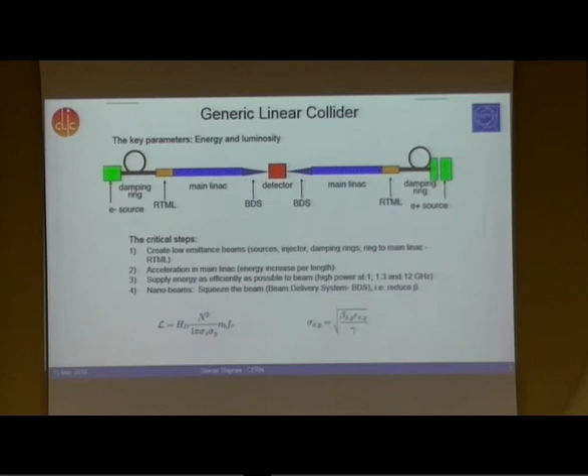For CLIC, we are using normal conducting X-band structures, so 12 gigahertz structures. For ILC, one is using superconducting RF structures. CLIC has set the goal to make this accelerator as compact as possible, and we are aiming now for a 380 GeV accelerator, which will be only 11 kilometers long. So it's a bit longer than the diameter of the LHC ring, but in fact it is quite compact. Then for any linear collider, one has to go through a beam delivery system, BDS, to try to reduce the beam size to the minimum, because what goes into the luminosity of the machine are the emittances and the beta functions of the beams, and then one has a detector. Next slide.

Here you see a map of a possible implementation of CLIC in 3 stages. So we are aiming for a first stage at 380 GeV, 11.4 kilometer. Then a second stage, which is still an open question because this depends on physics, around 1.5 TeV. And then we think the maximum we can go with this technology, given the geographical footprint in the area, is around 3 TeV, so 50 kilometer long machine.

But most of the work now is related to the 380 GeV machine, because we know already with the discovery of the Higgs and the known mass scales of all the standard model particles, that with the 380 GeV machine, we can do studies of the Higgs, we can do studies of the top quark, and all the other standard model particles in great detail.

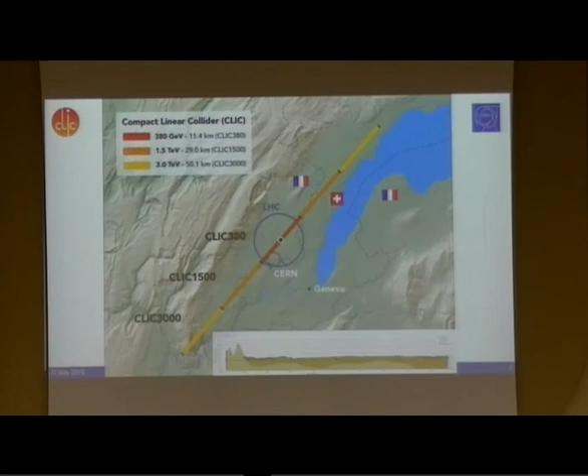Next slide. This is quite a complicated slide, and I don't think I would like to go in very much detail on that. First of all, up in the right corner, there is a little film you can play, but I will not try to play that online. I think that's too risky.

You can see the concept of the CLIC machine is, as I said, one has an injector. If you start in the yellow boxes close to the bottom, you have an injector for electrons and positrons, and then a pre-damping ring and a damping ring for positrons and a damping ring for electrons. One transports these beams out, and then you accelerate them in the main linac towards the collision point into a beam delivery system.

What is special for CLIC is that the most difficult thing, in addition to having the high gradient, is to supply the RF power to this machine. And if you try to do that, even with a 380 GeV machine with normal klystrons and modulators, you need 2,000 to 5,000, depending on the implementation of these modules. So this is possible, but when we go to 3 TeV, it becomes impossible. There are just too many of these klystrons needed, and the lifetimes and the reliability of them will not make it possible.

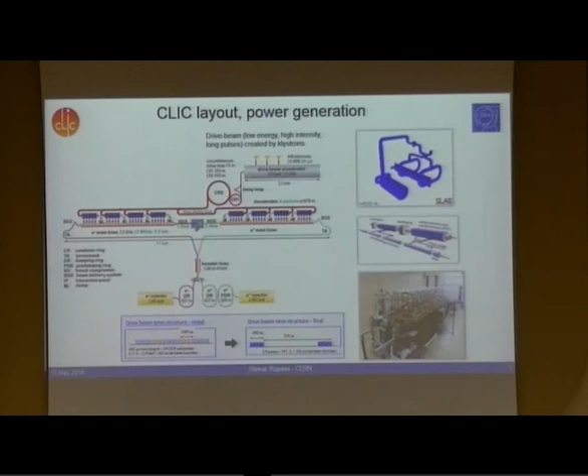And we have also, I will show that later, put such concept structures into a beam and proven that we indeed can extract the power and inject the power and get the acceleration we need. And as I said, if you run the film up in the right corner, you will see a demonstration of how this is happening. Next slide, please.

Okay, Maxime, now I move to the next topic. I will just show 3-4 slides about the main technical results we have. So if you go to the slide called two-beam acceleration now. Steinar, yes. I'm trying to follow your slides with a laser pointer.

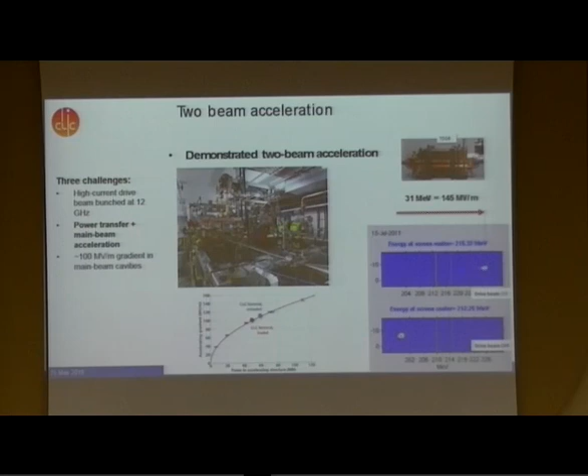Next slide. The next slide is really in Walter's domain, but this is really the core technology development of CLIC. These are X-band 12 gigahertz normal conducting copper structures, and in the middle you see a little disc, and we put 24 or 26 of these discs together, and we create the accelerator structure, which is shown in the middle. And then we pulse these structures with the systems shown below.

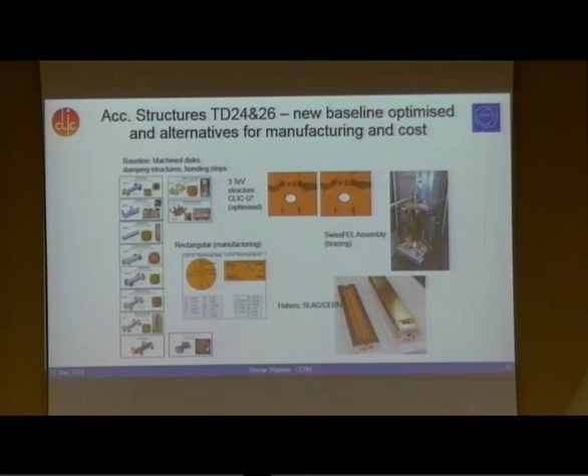And the next slide I can go through very quickly, but it's just to prove that there are industries who can do this. They can produce all the different parts of the machine, and of course that's important for the credibility of making it possible to build such a machine.

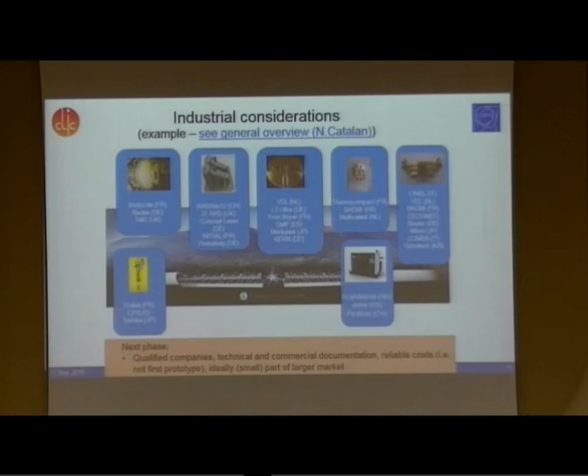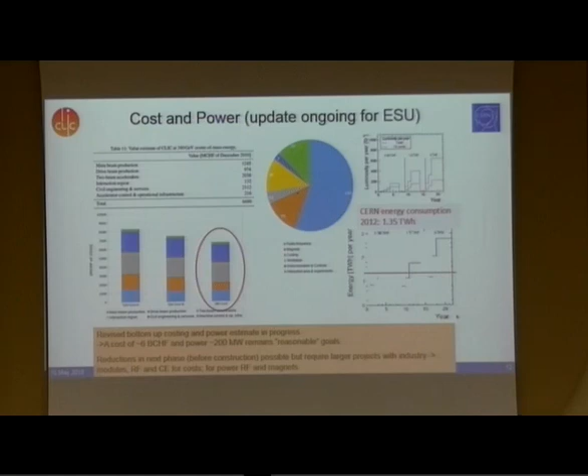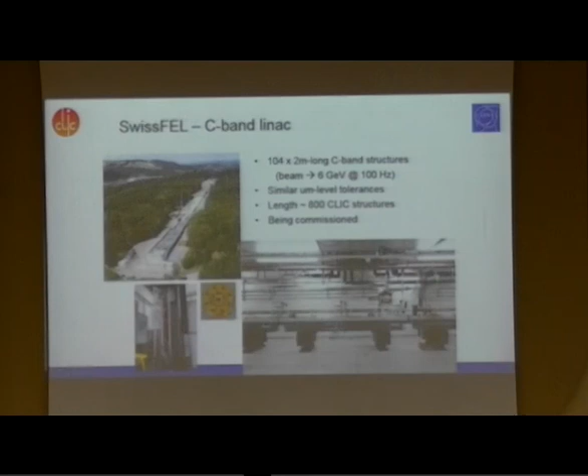Another key performance parameter, in addition to the energy, of course, and the gradient, is to make sure we have high luminosity. And this is quite complicated. We have to align the components of the machine over a significant distance. We have to control and damp vibrations from the ground to the accelerator. We have to measure the beams extremely well because that helps us to steer the beam and optimize positions of elements. We need sophisticated algorithms for measurements of beam and components and the feedback between all these.

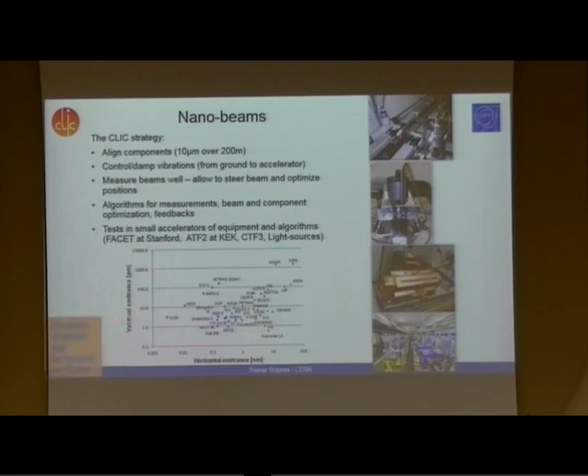And then we test all this in smaller accelerators. We test at FACET at Stanford that we can preserve emittance, ATF2 at KEK that we can produce the final focus parameters needed, CTF3, which is the machine I mentioned where we proved the two-beam scheme, and then light sources, which already produce emittances as we need for CLIC. So we try to put all this together to prove that we can reach the luminosity we advertise for the machine. Okay, go 2 slides forward. In fact, 3 slides forward, Maxime, to come to a very blue slide.

Yes, that one. So we are now thinking about what we need to do in the next phase of the project. And again, I will not go into detail, but you see the main parts of the project. We have to continue developing modules as needed for CLIC. And in fact, these modules are also very interesting for free electron lasers, where you can make very compact machines with this technology. We need to keep optimizing our structures. I mentioned producing them in halves.

We have to work on high efficiency klystron modulators, which provide the RF either to the drive beam or to the main beam if we want to do it directly. We are developing magnets. We need a lot of magnets, not very powerful bending magnets, but very sophisticated quadrupoles and focusing magnets of various types. And we try to work with permanent magnets to get the power down. And then there are all the practical and important issues related to civil engineering and infrastructure. So these are some of the key activities in the next phase of the project.

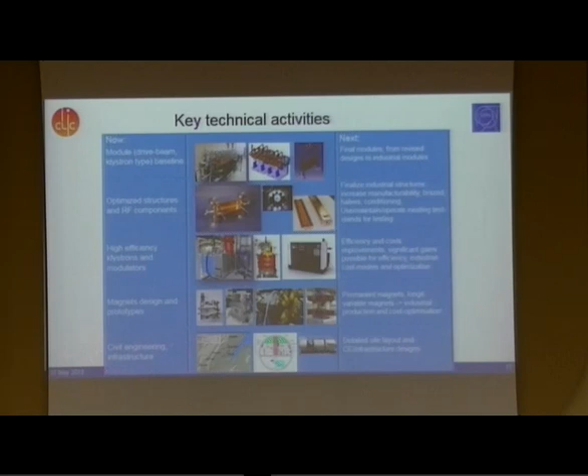Next slide. This is done as a collaboration, and the collaboration is a bit interesting. It's focused around CLIC, preparing the CLIC machine, but many of the collaborators now are using or planning to use the same technology for free electron lasers, varying from the large scale, so a 6 GeV machine, down to the very small compact machine you see at the bottom, where you have a 50 to 100 MeV electron beam colliding with a laser, and with Compton backscattering, becoming a mini light source, which you can use in-house.

So this is a 5 to 10 meter machine, which one could imagine putting in universities and in industries such that they can use it for investigations of material or biological samples or art or whatever they want to do with these types of machines.

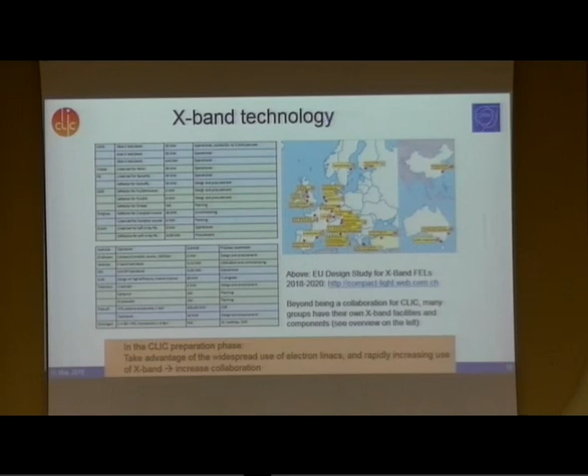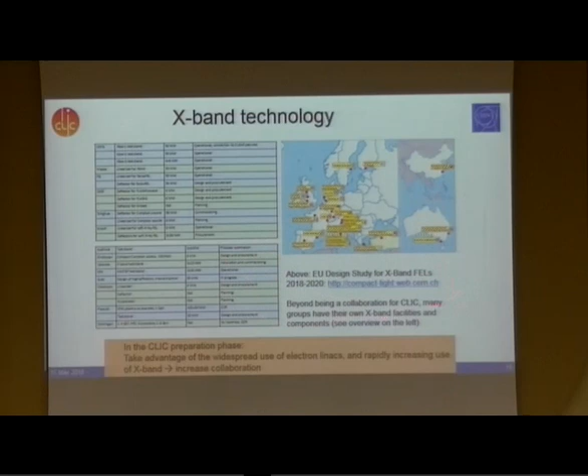Next one, you see here a list of the institutes around the world which have this type of technology, and this is increasing all the time. Walter, who is listening, keeps a close eye on the development in all the different institutes around the world. And we also have a design study supported by the EU for using this X-band technology for free electron lasers. And of course, next slide again.

Let's see. We are also thinking, could we use this type of technology for a smaller machine at CERN, for a specific type of physics, before we could implement a full CLIC? And we have a series of studies now which is called Physics Beyond Colliders at CERN. And one idea is to produce a 3.5 GeV electron beam, which is a 70-meter long machine, so it's quite modest, and inject electrons into the SPS and extract them for searching for light dark matter.

So this is in the case that dark matter is not the familiar things we've been looking for at LHC and LEP and Tevatron. It's not in the TeV, 100 to 200 GeV or higher range, but it's more in the GeV range. This is a very interesting idea which many people are pursuing, and we have found that if we could get electrons into the SPS and extract them in a correct way, we can do this probably better than anywhere else in the world.

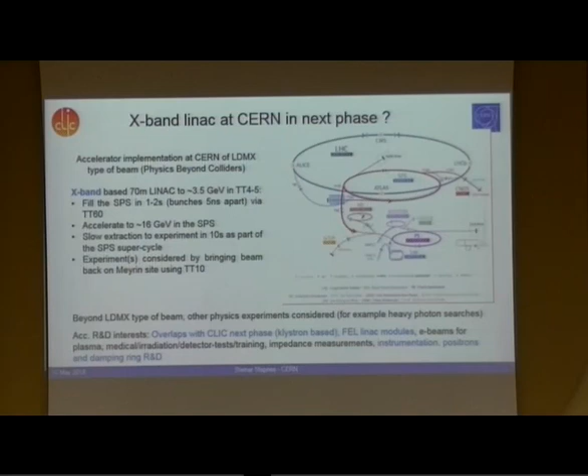So we are proposing this as a potential intermediate timescale machine at CERN using the X-band technology to make it cheap and compact. So this is another input to this European strategy. So this was a quick rush through the CLIC project. Then I will talk a little bit about what we have been doing with the Ukraine group so far. And these slides are in fact produced by Walter.

First of all, we have had a long-standing collaboration with Sumy, IAP Sumy, and this is related to X-band fundamentals, in the sense of what happens on the surface of copper structures and how we can optimize these copper structures. And this is experimental and simulation, and there's also exchange of scientific personnel related to this.

Next slide. So the issue there is that to test copper structures, I mentioned these Xbox systems, which pulse them at 50 hertz or 100 hertz and so on. But one could also imagine pulsing much, much faster, smaller samples, and then learn from that how to optimize the materials, both what type of materials, but also how to prepare the copper for use in an accelerator structure. So there is a setup like that at CERN where we've had key collaboration help from Sumy to characterize that.

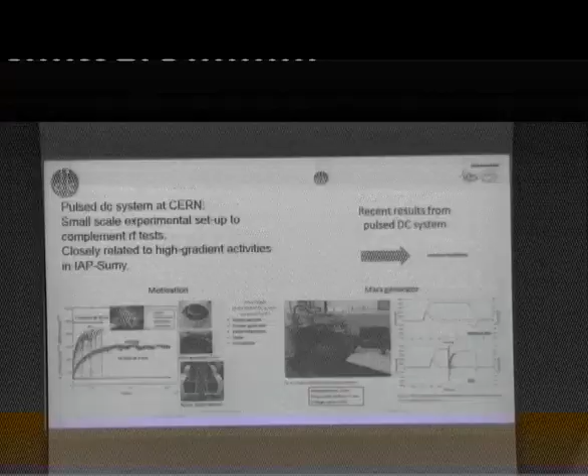And that's shown on the next slide. I think you need to. Is this the one called comparison of heat treated? Yes, it's comparison of heat treated.

Yeah, so this shows the different types of soft copper and hard copper, and how by pulsing with this DC system very, very quickly we can look at how the gradient develops, and you can see the difference in the two sets of curves. And we can also see that, for example, using hard copper, which is more tricky in a way when you put together the structures, we much quicker get to the gradients we are interested in.

So these are very, very interesting results, and it's very fundamental for us to understand as well, because it feeds directly back into how we produce the structures and how we specify these structures with industry. So it's an example of fairly fundamental research on material science applied in particle physics.

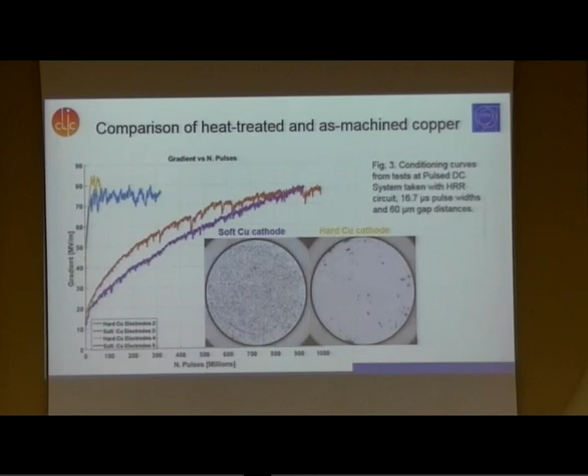Then I have a completely different one. And there, I think something has disappeared on the slide. This is an example, in fact, of, oh, sorry, I'm mixing this up. Yeah, so this is another example of collaboration. But let's go to the next slide there, Maxime. So the one after that.

So another area where we've had discussions for quite a long time. It goes back to 2013, 2014. We had a discussion with the groups in Krakow related to an EU application to support studies related to dielectric structures. This is now restarted in the sense that we have a working group inside CLIC to look at whether the CLIC machine could at some point be upgraded or changed using plasma technology or new technology for acceleration.

So this is a long-term development, which I will not discuss in any detail. And there are various ways of doing that. But one interesting way is to use dielectric structures. And in fact, we will have a presentation from the Krakow group on the 27th of June in our working group on compatibility between the CLIC machine and future technologies. And we also worked with Argonne in the US on this topic.

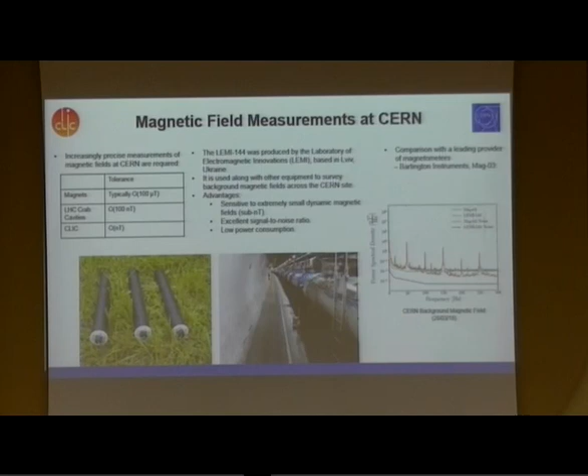And finally, one other area where I remember we discussed this in 2013 and 14, but we never followed it up. This is the idea of using an electron linac for neutron production, in fact, and I believe that has some interest in Ukraine, and we have other collaborators or other contacts there. We have in particular worked with a group in Tokyo, and I gave you a link to a talk at what is called a high gradient workshop in 2015, where they look at this, and the idea is that, of course, if you can make this electron linac very compact, this could have eased the implementation of such an electron linac.

And in fact, they're interested at the University of Tokyo because they even want to make this a transportable system, because they wanted to look at what happens in the Fukushima accident, and they wanted to move the electron linac up to look at the situation at the site after the accident. But they also have a facility at the University of Tokyo. And I remember we discussed this also with Jakov, if this would have an interest for future collaboration, but we never pursued it, and to my knowledge, we have not continued working on that. But maybe this is an area where we could consider future collaboration.

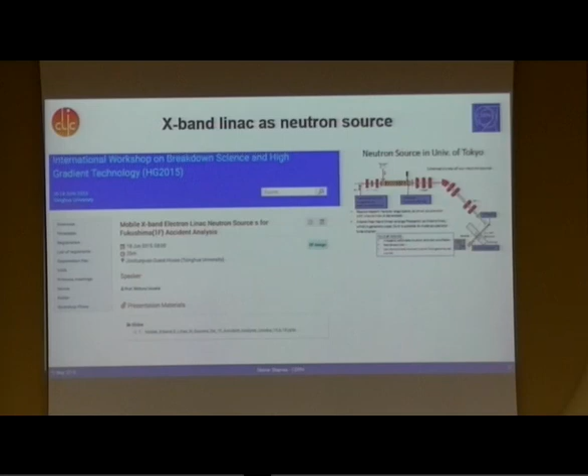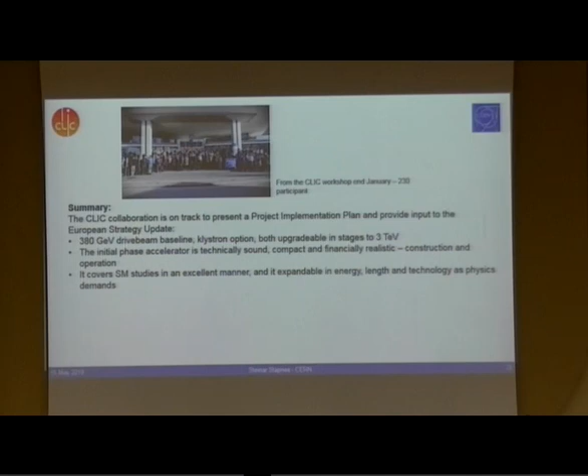Okay, so that brings me to the last slide. I go back to the CLIC collaboration. So we are preparing a project implementation plan for the European strategy. We focus on a 380 GeV CLIC implementation with drive beam as a baseline, but also looking at klystrons to drive the beam. Both are upgradable. So we think this is a healthy project in the sense that we think it's technically sound, it's compact, it's financially realistic, and so on. And it covers the standard model physics very well.

In the collaboration, and this is also an opportunity, I think, for groups in Ukraine, the technology is also a technology collaboration. So the technology has a spin-off to smaller systems, free electron lasers and other types of medical machines and so on, which I haven't talked about, but there it can have an impact to be able to go more compact, so this is interesting for many of our collaborators, and in fact we get a lot of feedback from smaller projects among our collaborating groups. We now are planning for the next phase, and of course we'd be more than happy to include interest from Ukraine in our plans for the next phase. That's it. Thank you.

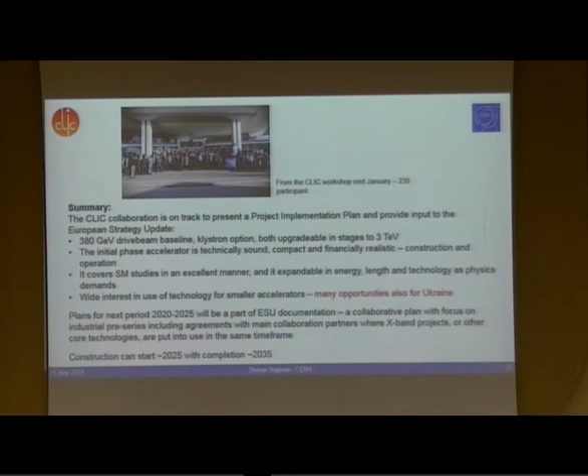More questions? No? Okay, so let's thank Steinar and Walter again for joining us. Thank you very much, we value your time very much, and we keep you for the next two talks, which will be related to CLIC structures. So we will keep the microphone on so that at the end of the talks you can ask questions if you would like, okay? Okay, thank you. Thanks. So we are in a hurry because we risk missing the conference dinner.

So I ask the next speaker to be shorter, also because Dr. Steinar already explained the main things connected with the ambitious CLIC project. So the next speaker, Dr. Vladimir Baturin, will explain experimental results obtained jointly with CERN.

Development of methods for increasing the stability of the material of accelerator structures to high vacuum electrical discharges in the CLIC structures, and experimental studies of the influence of an external magnetic field on the probability of a high vacuum breakdown.

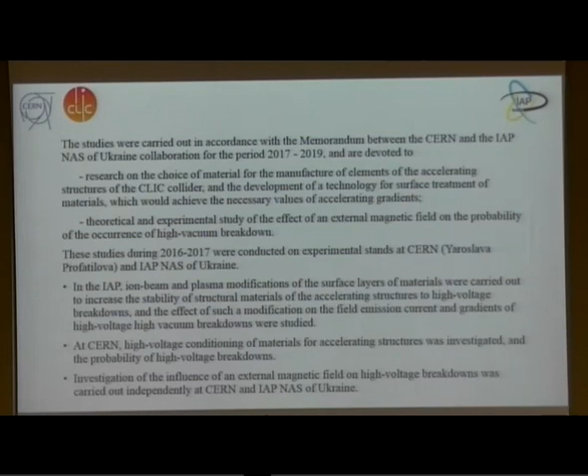At CERN, high voltage conditioning of materials for accelerating structures was investigated, and the probability of high voltage breakdown. Investigation of the influence of an external magnetic field on high voltage breakdown was carried out independently at CERN and the Institute of Applied Physics.

The CERN DC Spark system: the first installation contained a plain cathode and tip anode, and the next installation has large area electrodes installed. Experiments on the conditioning for different materials at CERN. Experiments were carried out on the large electrodes installation.

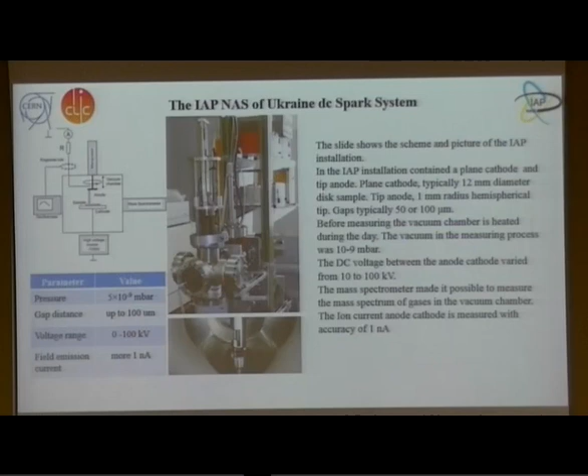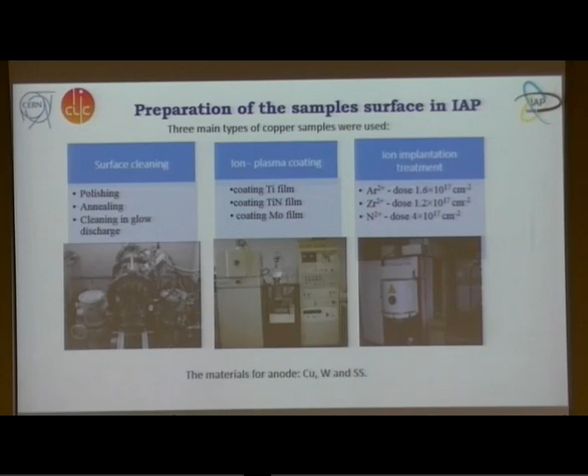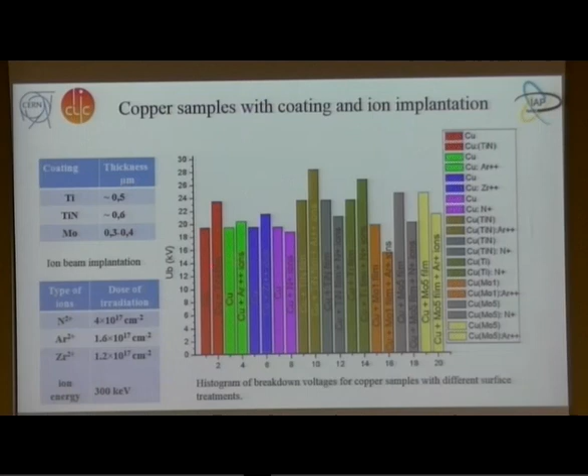This slide shows the total histogram of breakdown voltage for copper samples with different surface treatment: copper plus titanium film, copper plus argon 2+ irradiation, and others.

It can be different inclusions on the surface of the electrodes, grain boundaries, surface defects obtained during manufacture. In this case, the titanium nitride film smooths and fills surface defects. Thin titanium nitride films on the copper surface can behave as a barrier to the diffusion of gas from the cathode volume. In the study, the anode was made of tungsten.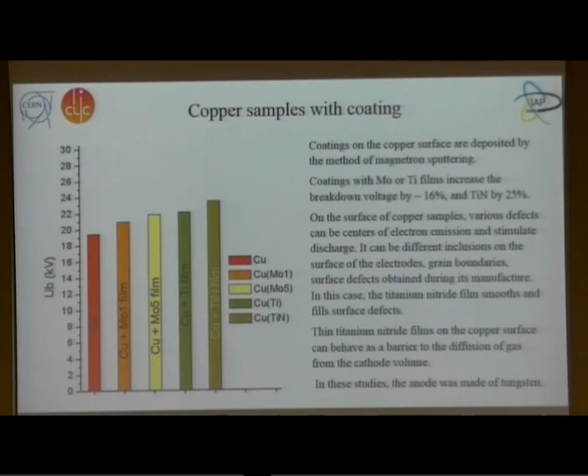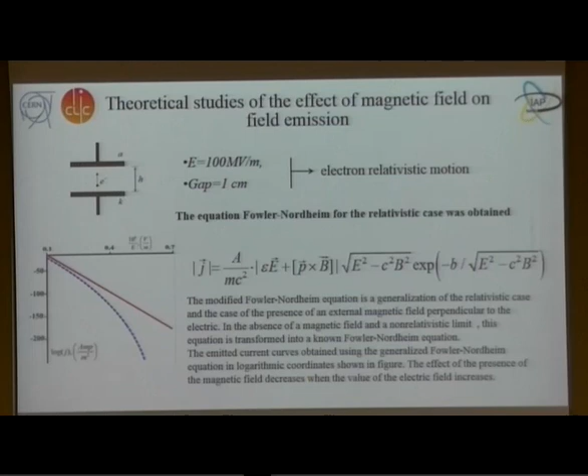A theoretical study of the effect of magnetic field on field emission. The Fowler-Nordheim equation for the relativistic case was obtained. Next, experimental studies of the effect of magnetic field on high voltage breakdown, where the magnetic field is perpendicular to the electric field. The experiments at CERN were carried out on the large electrodes facility. The magnetic field perpendicular to the electric field does not affect the probability of breakdown.

An experiment performed at the Institute of Applied Physics has shown that the magnetic field leads to an increase of the dark current between anode and cathode, and a decrease of the breakdown voltage by 10-20% for all copper samples, regardless of the surface modification.

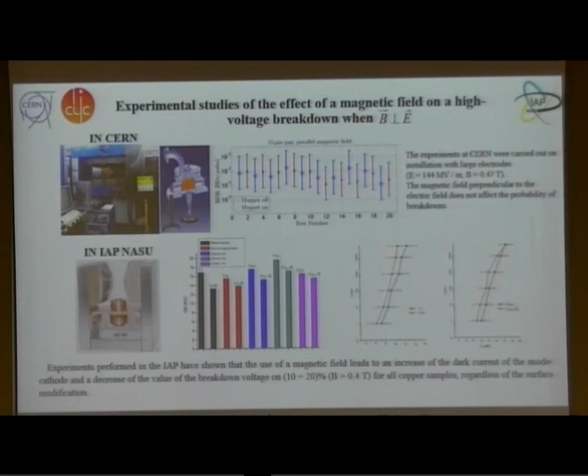Conclusion and future plans. The next project is planned to continue these studies, in particular to determine in more detail the optimal value of the thickness of the coating and the dose of the irradiation. It is also important to focus on the measurement of dark current and its dependence on the type of coating and the dose

on ion irradiation. It is also important to investigate the dependence of the breakdown voltage and the dark current on the distance between the electrodes. And ion plasma modification of large copper samples will be carried out for joint research at the CERN facility.

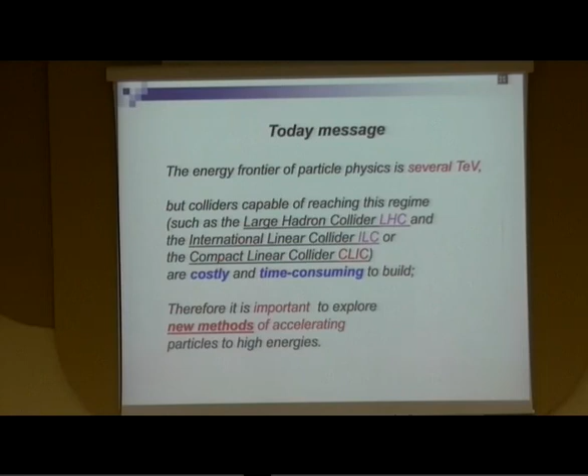Motivation of this study is that the energy frontier of particle physics requires energies of order TeV energy range. But colliders capable of reaching this regime, such as the Large Hadron Collider or International Linear Collider, or CLIC, about this scheme was reported in the first presentation of our session. These devices are very costly and time-consuming to build. You can see that the compact linear collider is planned to finish in 2035, after 20 years. Therefore, it is important to explore new methods of accelerating particles to reach high energies.

Future colliders, I am sure, will be based on an advanced method of acceleration. Among them, laser plasma wake field acceleration, beam plasma wake field acceleration, beam dielectric wake field acceleration. The best results now are experimentally obtained for laser wake field acceleration, where an accelerating gradient of about 100 GeV per meter is obtained in Berkeley National Laboratory and Texas University. And a scheme of plasma wake field acceleration obtained an accelerating gradient of about 50 GeV per meter at SLAC.

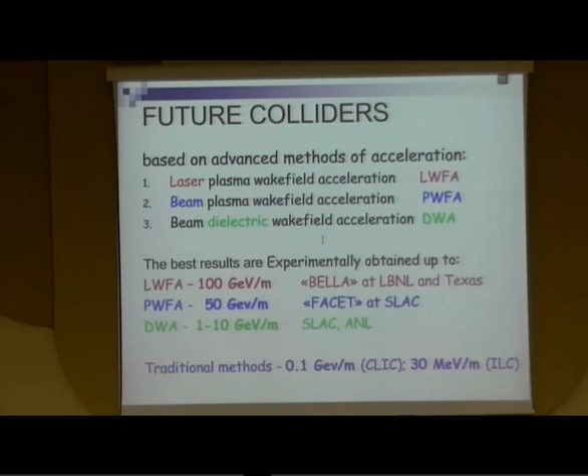And dielectric wake field acceleration now has obtained an accelerating gradient experimentally up to 3 GeV per meter at SLAC. For comparison, you remember that CLIC will provide 100 MeV per meter, and International Linear Collider will provide 30 MeV per meter.

Dielectric wake field acceleration is based on Cherenkov radiation of a bunch in a dielectric slowdown structure, and the accelerating gradient is proportional to bunch charge and inversely proportional to the square of the vacuum channel. And wavelength is proportional to 4 thicknesses of the dielectric layer.

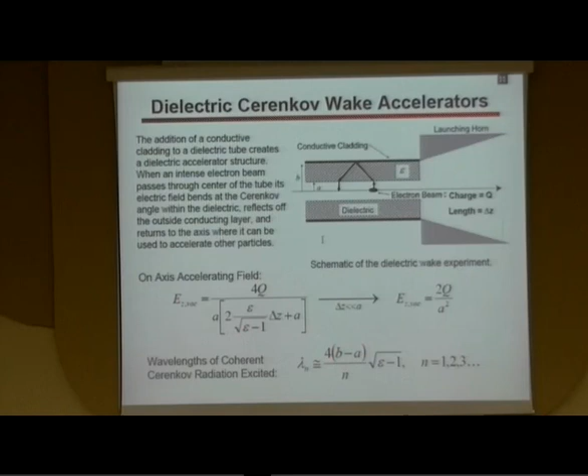The studies I will talk about are carried out in the framework of the execution of STCU project P5222 in collaboration with Argonne National Laboratory. The experimental installation on which we carried out our experimental investigation is shown here.

It provides the following parameters: beam energy of electrons from 2 to 4.5 MeV, pulse current up to 1 ampere, duration of the pulse 2 microseconds, bunch repetition rate about 2.8 gigahertz. The number of bunches we can change from 300 to 6,000. Each bunch charge is about 0.32 nanocoulombs. Bunch length 1.7 centimeters, and bunch diameter 1 centimeter.

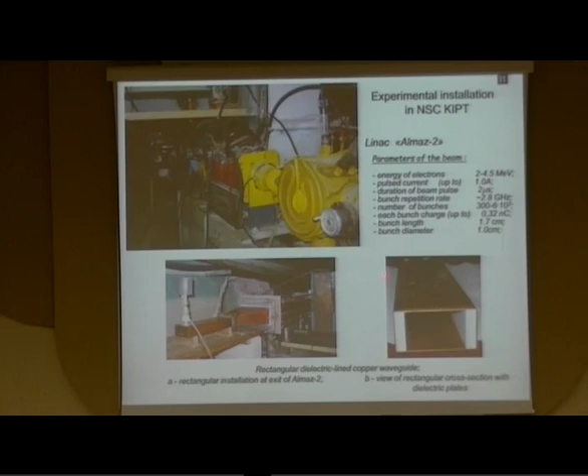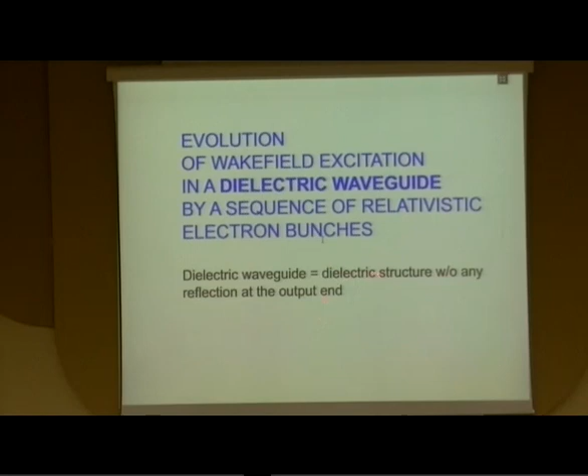Below you can see an example of the slowdown structures used to accelerate, and a rectangular example of our dielectric unit. At first, I will talk about wake field excitation in a dielectric waveguide by a sequence of relativistic electron bunches. By dielectric waveguide, I mean a dielectric structure without any reflection at the output end. What is the problem of this statement?

We have shown before that the Cherenkov radiation train behind the bunch at the waveguide exit is limited to some length. The Cherenkov train is proportional to the length of the dielectric structure and the difference between group velocity and phase velocity, or velocity of the beam. Therefore, due to removal of the wake field from the waveguide exit with group velocity, the maximal number of wake fields whose summation leads to total wake field increase is restricted to this number.

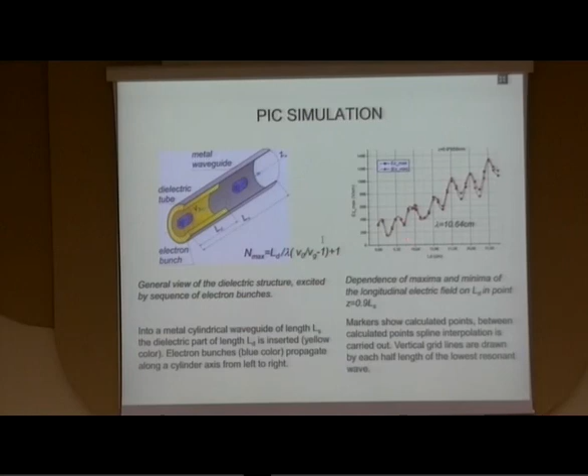Vertical grid lines are drawn for each half length of the lowest resonant wave. Maxima are located when the length of the dielectric structure is a multiple of half the wavelength of the principal mode. Experimental study results are shown in this slide. These measurements were made for a non-matched device and a matched device.

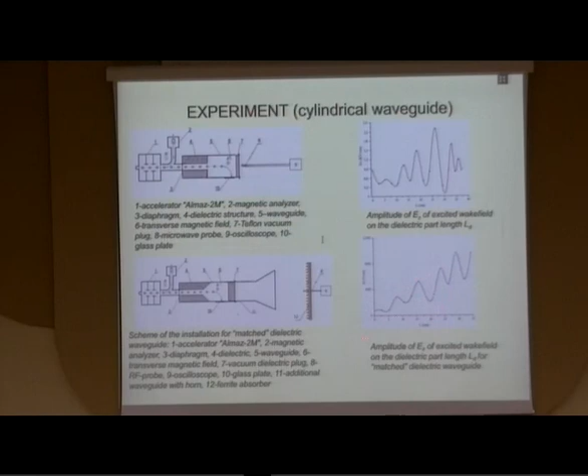This installation consists of the accelerator, magnetic analyzer, dielectric tube, dielectric plug, and measurement devices. In comparison with the non-matched case, there is a dielectric cone, horn, and ferrite absorber. The best result we obtained was for the matched case, and these results are in good agreement with theoretical prediction.

The second studies were made for a dielectric resonator, and by dielectric resonator I mean a dielectric structure with short-circuited input and output ends. The resonator eliminates the effect of removal of wake field from the structure, and the optimal condition of excitation of the dielectric resonator by a sequence of bunches is similar to excitation of an optical resonator by a mode-locked laser equipped with an optical switch. At the moment when a short pulse of radiation reflected from the output end of the resonator appears at the input, the optical switch injects the next pulse into the resonator.

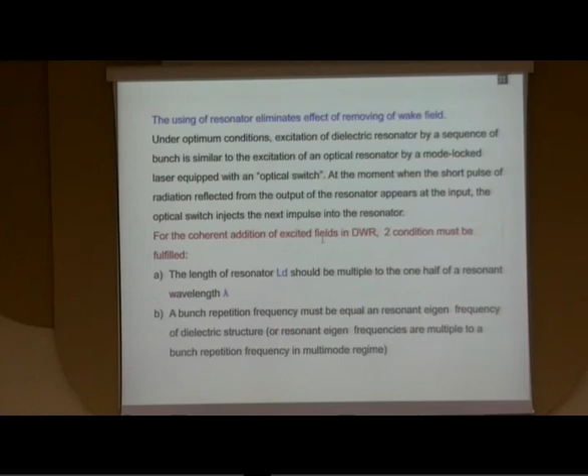For the coherent addition of excited fields in the dielectric wake field resonator, 2 conditions must be fulfilled. The length of the resonator should be a multiple of 1/2 of a resonant wavelength. And the second condition, the bunch repetition frequency must be equal to the resonant eigenfrequency of the dielectric structure, or resonant eigenfrequencies are multiples of the bunch repetition frequency in the multimode regime.

A planar example of increasing excited wake field in the resonator is shown in this structure. Parameters for the computation were chosen the same as the experimental installation. On the left, you can see the excited wake field after injection of 5 bunches. The excited gradient is 3 kV per centimeter, and after injection of 100 bunches, the excited wake field is equal to 60 kV per centimeter. Thus, you can see accumulation of the excited wake field in the resonator.

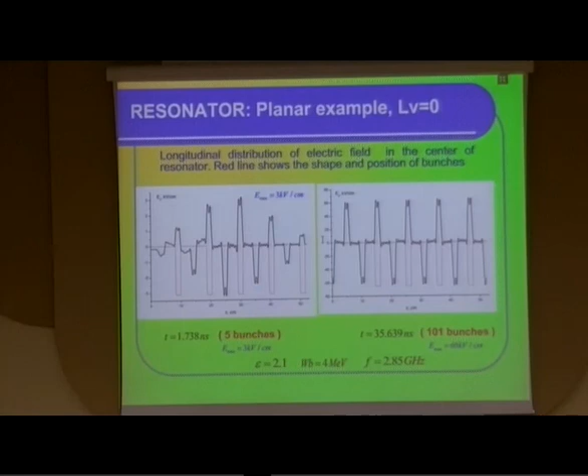For testing this prediction, we have made experimental measurements of the excited wake field in the resonator statement. In comparison with the previous installation, we have a dielectric plug to support vacuum in the dielectric unit, and a short circuit plunger in order to change the vacuum part of the resonator. In the right figure, you can see the dependence of the longitudinal electric field on the length of the vacuum part of the resonator. You can see very peaked maxima at the length of the resonator multiple to 1/2 wavelength of the vacuum part.

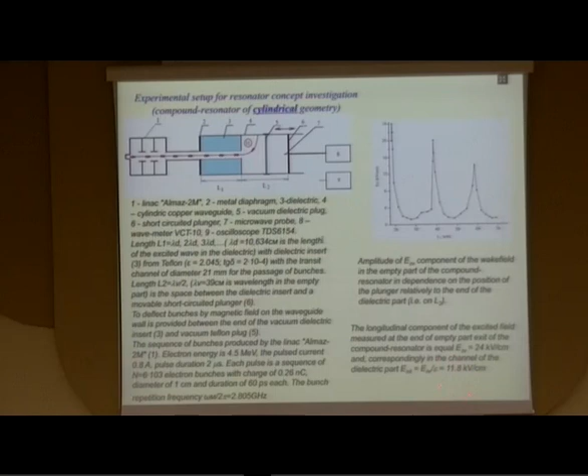In this case, we obtain an accelerating wake field of 24 kV per centimeter. That allows us to obtain an accelerating field inside the dielectric part that is equal to about 12 kV per centimeter.

The measured dependence of wake field amplitude on the number of bunches injected into the resonator is shown here. This oscillogram shows the beam current, red line, and microwave signal for three cases with different numbers of injected bunches. The first 300 bunches, 900 bunches, and about 4,000 bunches. You can see that with injecting additional bunches, the excited wake field increases.

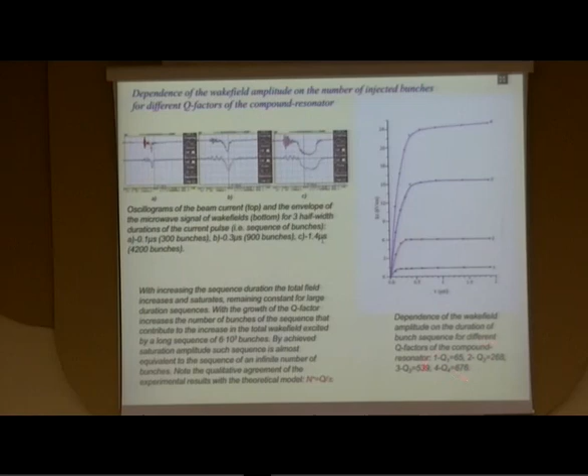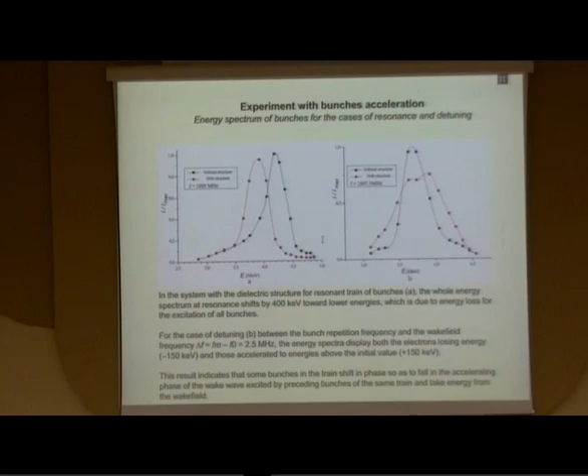We also studied the dependence of the excited wake field on the Q factor of the resonator. This is shown in this slide for different Q. Very low, a very bad resonator with Q of 65, and the last example, a relatively good resonator with Q of 678. We also studied acceleration in this structure. An example of acceleration is shown in the right slide. In these studies, we have obtained acceleration of bunches of about 150 kV.

The last studies of the plasma dielectric wake field accelerator focus on drive and accelerated bunches. Although the dielectric wake field accelerator has a lower accelerating field in comparison with other advanced schemes, PWFA or LWFA, it can be considered a promising candidate for future electron-positron TeV colliders. But there is one shortcoming. It suffers from beam breakup instability. Also, it is a common shortcoming for all linear accelerators.

In comparison with the traditional scheme of suppressing BBU instability, we proposed, for focusing of the drive and witness bunch, to fill the drift channel with a plasma of certain density. Also, plasma filling can increase the accelerating gradient.

Our idea is demonstrated in this slide, where the axial electric field, the accelerating gradient, and the focusing electric field are shown. You can see that the drive bunch, the yellow rectangle, and the accelerated bunch are in the focusing phase of the total wake field.

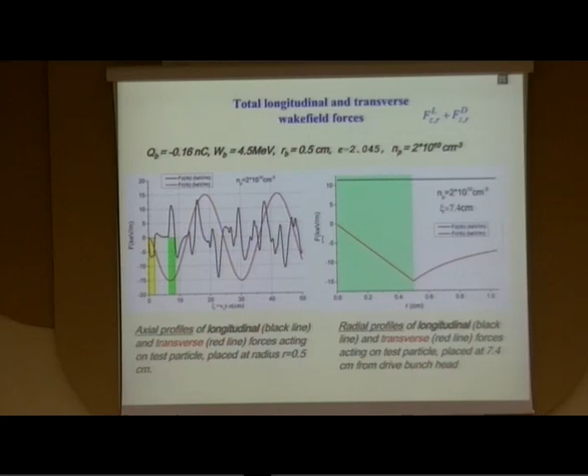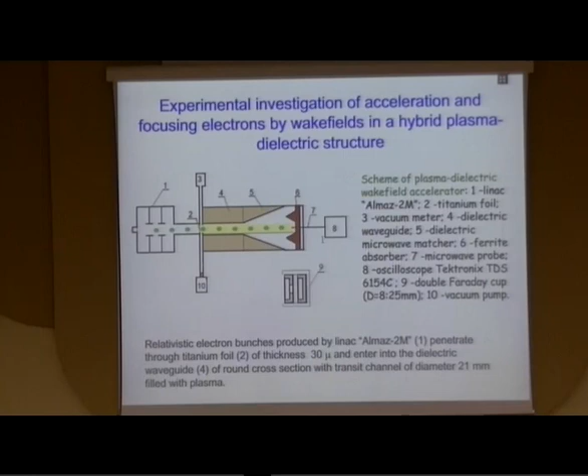For the experimental investigation of acceleration and focusing of electrons by wake fields in the plasma dielectric structure, we used this installation. In comparison with the previous scheme, we have a vacuum pump for pumping neutral gas in the unit, and for diagnostics of focusing, we have a double Faraday cup with different diameters, with different holes, and that allows us to measure the passing current.

I cannot do a conclusion. I'll say about further studies of our dielectric wake field acceleration. It is the arisen problems of wake field acceleration, wakes in long tubes, direct measurement of accelerating fields, measurement of the transformer ratio that plays a great role in acceleration. It is very important for multi-zone two-channel drive and witness channel dielectric accelerators.

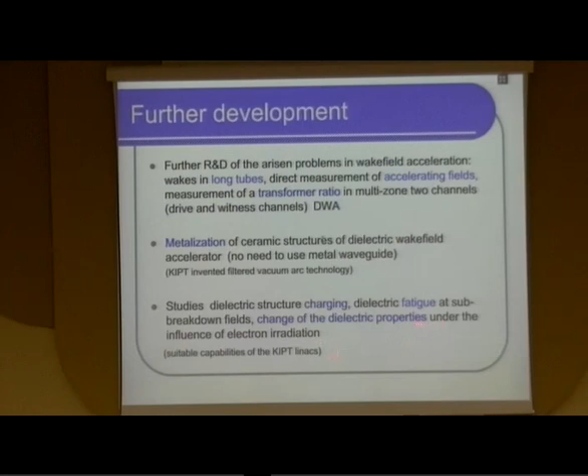Metallization of ceramic structures of the dielectric wake field accelerator, so there is no need to use a metal waveguide. And studies of dielectric structure charging, dielectric fatigue, sub-breakdown fields, change of dielectric properties under the influence of electron irradiation. That's all. Thank you. Thank you very much.

Does somebody have a question? Steiner, Walter, do you have some questions? Very, very interesting. It will be interesting also to see the slides. It was a bit difficult with the video connection. We definitely are very interested in this kind of work. Just a comment, of course, when comparing gradients, these pulses tend to be rather short compared to the relatively longer normal conducting and superconducting pulses. But I think we will look forward to discussing these subjects in the coming weeks.

Yes. I want to say that the scheme I spoke about belongs to the two-beam accelerator scheme. More advanced, but it is a two-beam acceleration scheme. I am very old, and I remember that 50 years ago, Professor Sarantsev in Dubna promised to build this accelerator. Yes, but you see, the situation is very complicated. So, supporting this very exciting idea, don't close the alternative, very mature and very recognized technology. It's just advice. Thank you for your comment.

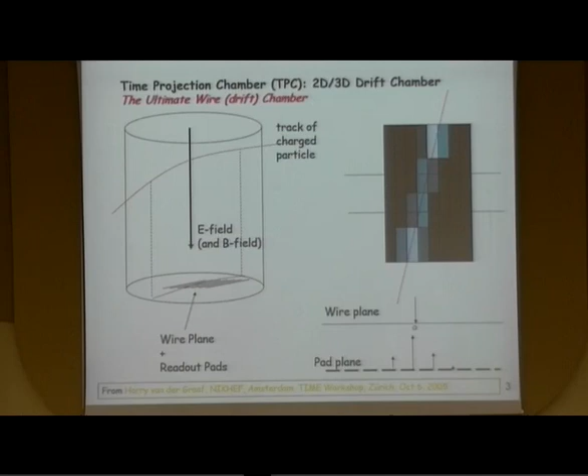Very simple, for the time projection chamber, time is short. The main readout used in old such systems on the 2D plane was wire drift chambers. In recent years, these wire drift chambers were changed by more perfect systems on the base of GEM or Micromegas or InGrid micro-pattern gaseous detectors. Some examples of these systems you can see here.

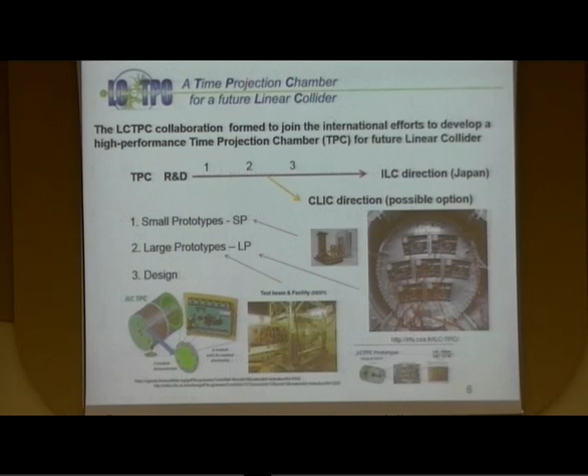LCTPC works in this direction: small prototypes, large prototypes, and design. Now, the large prototype is the stage of this collaboration. We also work in our directions in the scientific work in this frame: development of the test tool LITEH on the base of the electron linear accelerator at LAL.

Study of MPGD panels as part of the ILD detector at LITEH, and development of a test facility at the nuclear physics department to characterize and study MPGDs, various types of micro-pattern gas detectors, but first of all InGrid detectors. The whole work is performed in cooperation with LAL and IRFU from France.

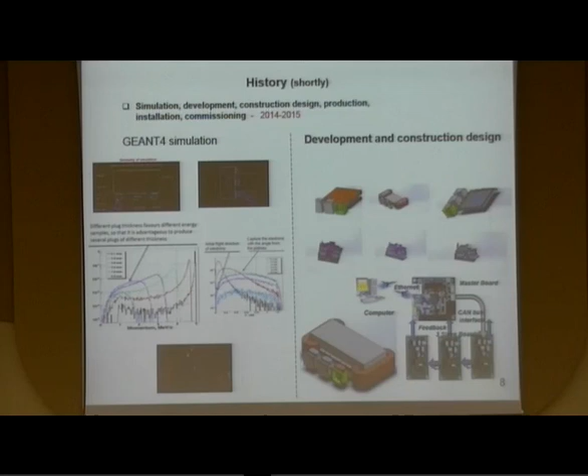You can see our work from simulation, development, construction, design. The magnet was produced at CERN. Other parts were produced in our department with students: electronics, mechanical parts, and all the other parts. And you can see design, production, and commissioning of this system.

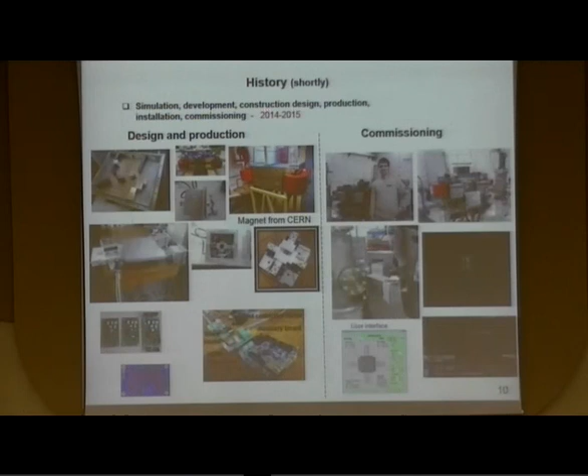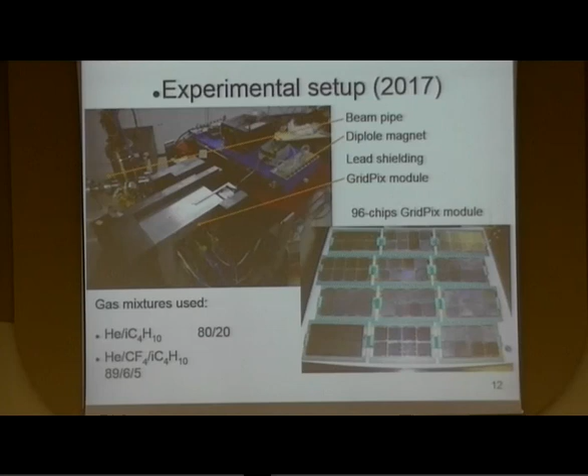After commissioning of the system and tests on simple detectors, the first large use of the system was measurements using a GridPix module, a large module of 96 InGrid chips from Bonn University. You can see the large module, and in the experiment we obtained tracks on this module in a parallel plane.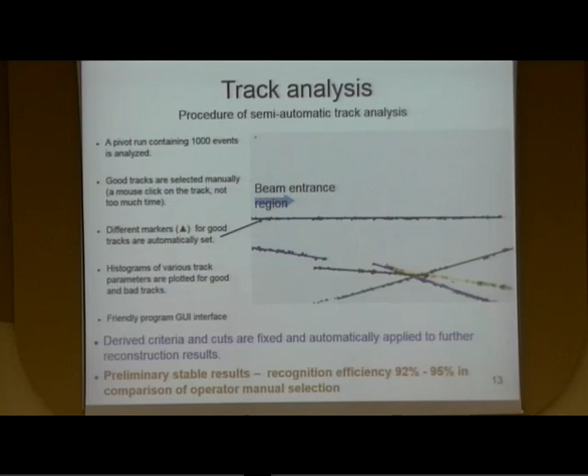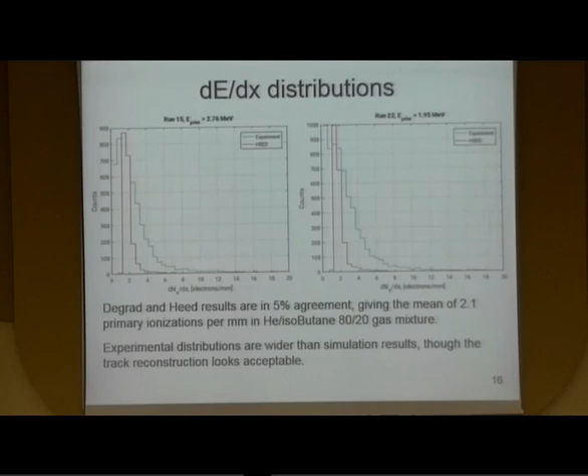After that, Vlad Krylov wrote a special program for semi-automatic track analysis, and now he works in the direction of analysis of stopping power in various gases and others.

Also, we now study track reconstruction using hardware chips for acceleration of the first calculation steps, using FPGA, SoC, and SoC plus GPU, and new systems, artificial intelligence hardware chips. For example, you can see Movidius Myriad X. The new direction is very interesting, especially for students, and promising. Our test facility, the main part of this work for us and our students, was to build and develop a facility in our department.

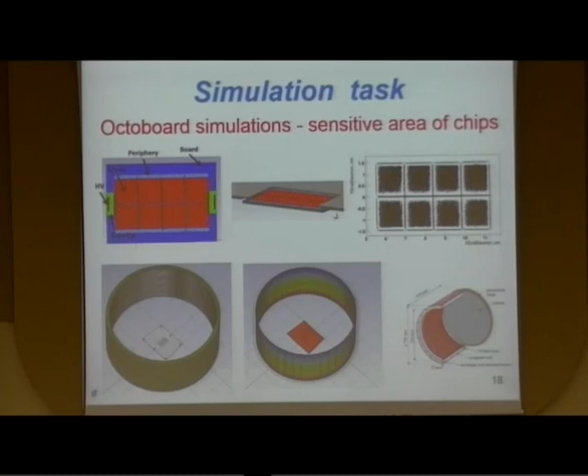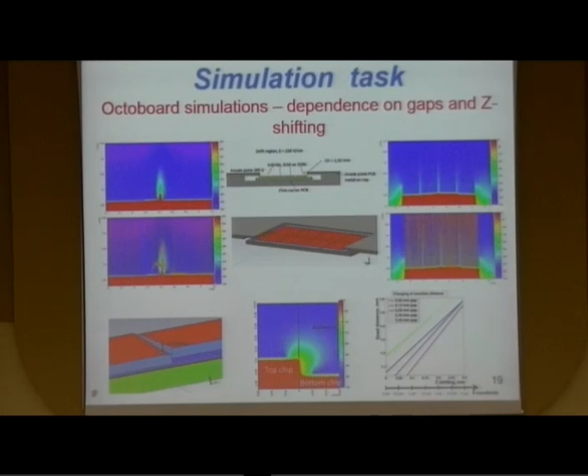Now we are working in these directions, our students, and we learn to use special tools such as Garfield++ and others. You can see first results, simulations: simulation of geometry and electric field of the micro TPC at IRFU. And for example, a simulation task for the octoboard, 8 chips on one octoboard, and you can see some problems for this octoboard in the simulation system.

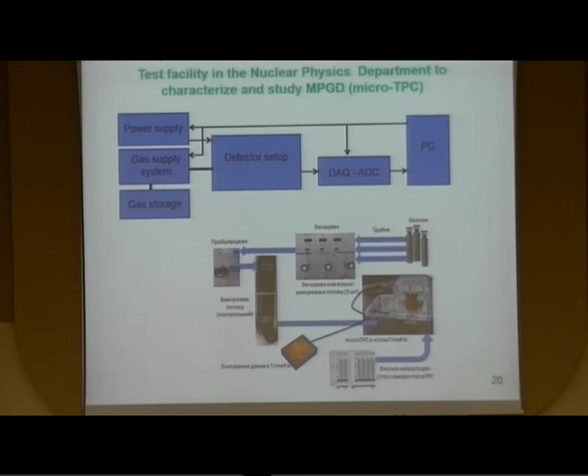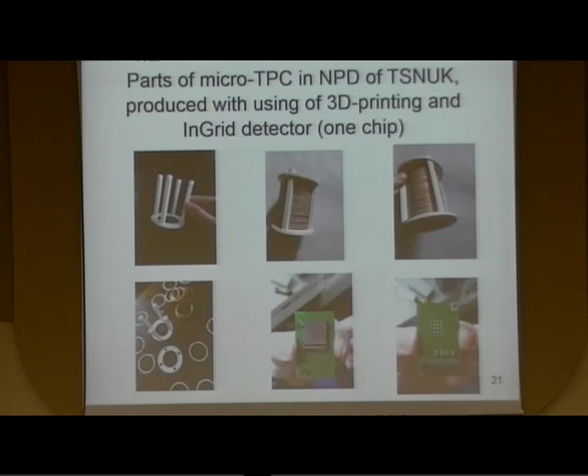And now we are building a test facility in the nuclear physics department. We have the main parts of the system. Now we work on the readout part for the micro TPC. You can see, for example, the work of our young people who made a micro TPC using a 3D printer, and now the students are working on the readout part.

Conclusions, same as part of my presentation, and I think I finished. Thank you very much.

Do you have any questions? Comments? No. Okay.